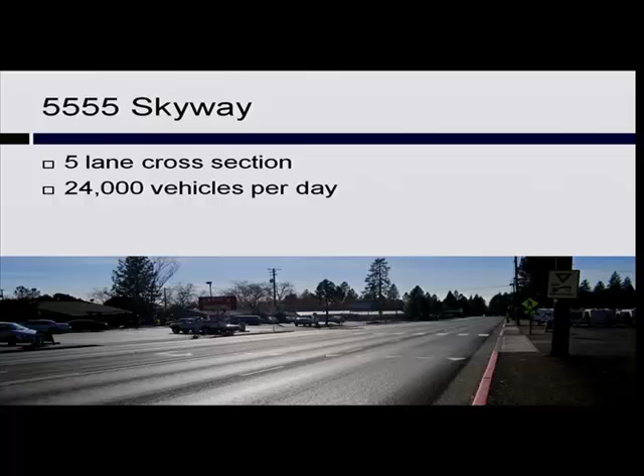First, as far as existing conditions and project history, let's divide the presentation into two different areas: one in front of Town Hall here at 5555 Skyway, and also in our downtown district between Pearson Road and Elliott Road. Here at Town Hall, we have a 5-lane cross-section and 24,000 vehicles per day. In the last 3 years, we've had 3 fatal pedestrian collisions in this influence area of Town Hall.

In downtown, however, we have different fixed parameters. We have a fixed 60-foot road width. We must provide on-street parking for the businesses, and we have a 20,000 vehicle per day traffic count. From those existing fixed conditions, we have many different observed challenges.

We have 2 independent and inefficient traffic signals, 7 uncontrolled crosswalks. Left turns currently cause through lanes to back up, so it serves as a turn lane when the number 1 lane backs up due to a vehicle looking to turn left. We have an aging roadway, limited lighting, and non-ADA compliant curb returns. That means our mobility is restricted downtown because we don't have ADA compliance for going from business to business, and that's an issue downtown.

We currently have high motorist speeds. Average speeds can range between 37 and 38 miles per hour. This specific section downtown has the highest collision rate in the town of Paradise. We have a 5.89 collisions per million vehicle miles rate, and that's nearly double the state average.

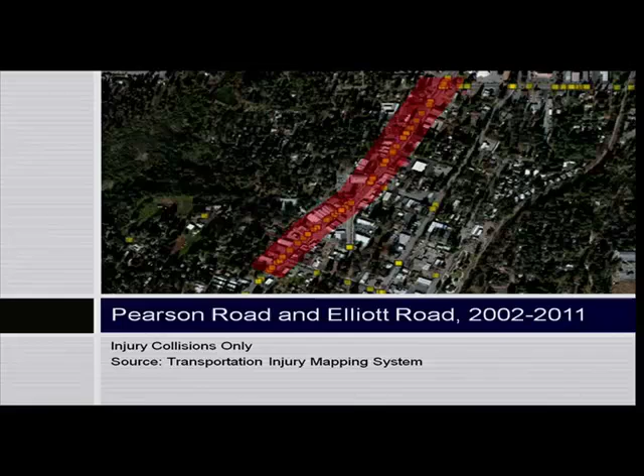As far as our downtown collision data, in the last 10 years we've had 90 injury collisions, indicated on this map with the yellow dots highlighted in red. Of those 90 injury collisions, almost 50 are rear-end accidents, which is a direct correlation to the lack of a turn lane. In addition, the majority of those collisions are due to unsafe speed, which again traces back to a lack of a turn lane.

When police officers categorize what actually caused a collision, unsafe speed is generally a catch-all for following too close, not paying attention in front of you when a car is looking to turn left. Again, of those injury collisions, who's involved? Another motor vehicle - yes, 72 out of 90, the majority. But in our downtown, our supposedly most pedestrian-friendly area, we've got 10 involving a pedestrian or bicyclist. So that presents a very big challenge in our downtown.

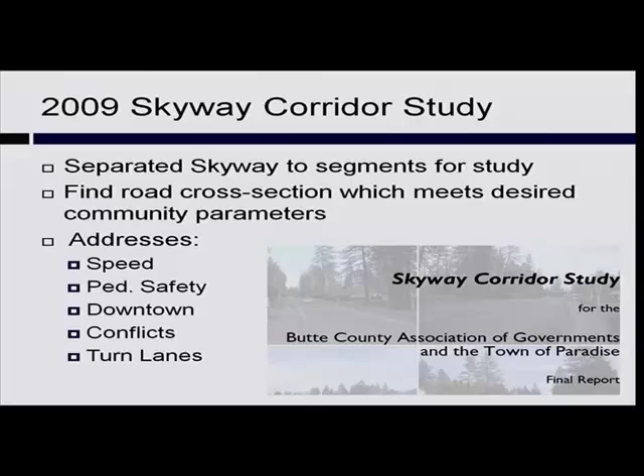So how did we end up with this project? It all started back in 2008 or 2009 with the Skyway Corridor study. This study looked at the adjacent land uses for Skyway between town limits, and divided each section into segments, looking at the best road cross-section to meet our desired community objectives. Part of that report addressed speed, pedestrian safety, downtown issues, conflicts, and turn lanes.

As far as looking at Segment B, which is the downtown, they determined that critical on-street parking must stay, but we are observing high speeds and frequent collisions. The average motorist yield rate for a crossing pedestrian was as low as an average of 42%. That's indicative of a pedestrian looking across the street and motorists just flying by, not paying attention to the state law which requires motorists to yield to pedestrians crossing the street.

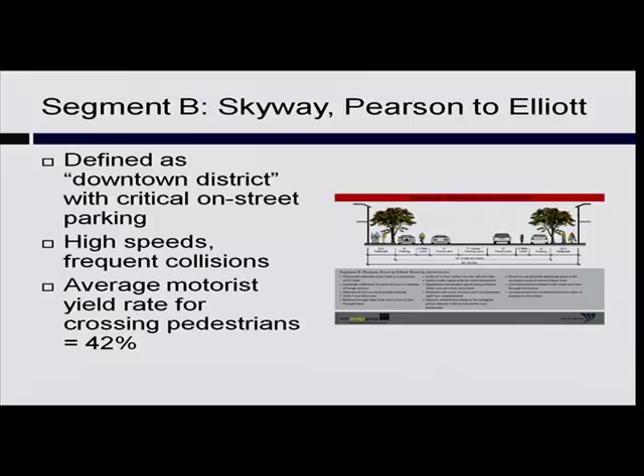As part of this corridor study, they did an extensive public outreach process, complete with stakeholder meetings and interviews. They had a public workshop where you could vote on different alternatives, and they also met with the RDA Citizens Advisory Committee. They also looked at different alternatives.

They considered alternatives 2 and 3. Alternative 2 was 2 travel lanes only, no turn lane, and 45-degree parking because we have a fixed road width - that was not selected to move forward. Alternative 3 was 2 northbound lanes and 1 southbound lane with a center turn lane also. This alternative was not selected to move forward because it did not meet all of the objectives for pedestrian safety.

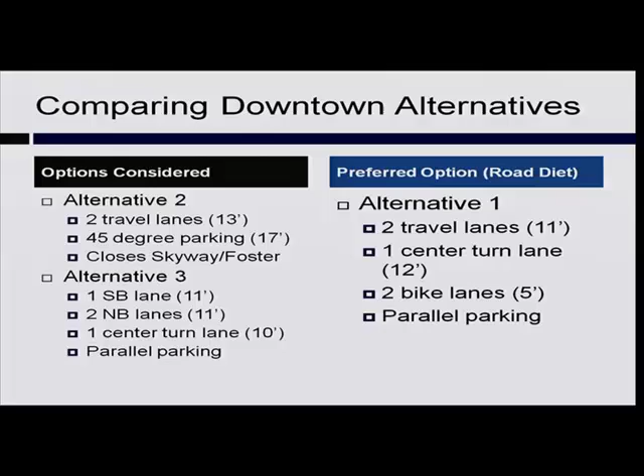However, they did conclude that their preferred option was a road diet, that being alternative 1, including 2 travel lanes, 1 per direction, and a center two-way left turn lane, including 2 bike lanes or a buffer, while maintaining the parallel parking. So why a road diet?

Why should we consider moving forward? Well, in the pre-1980s, road design was very different than what it is today. If your road volume was greater than 6,000 vehicles per day, then widening was the perfect candidate. They stated that safety would improve because we would add gaps between the traffic. More capacity, more gaps, safer. Their conclusion was also that you could avoid a rear-end collision by changing lanes. You'd no longer have to yield to the person in front of you, you could just go around them.

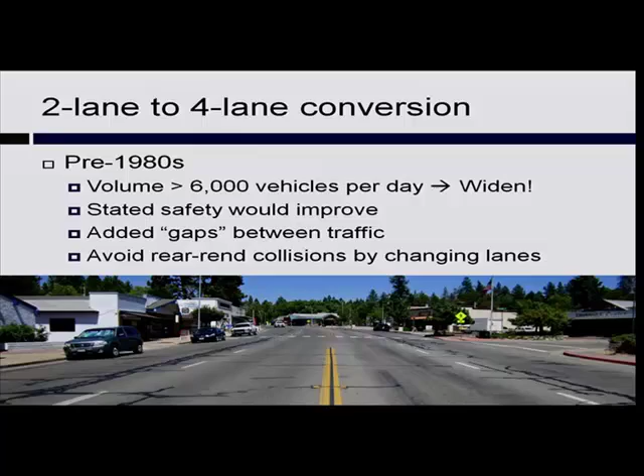Here's an example of that 4-lane layout similar to exactly what we have on Skyway. But in 1999, they did a report on that expansion. Was that decision really an effective one? When they compared different corridor elements such as volume, delay, speed, travel time, or percent traveling over the speed limit, all of those indicators increased. The accident rate increased 14%, while the injury rate increased 88%. So what they found is that without a balance to the roadway, there are more problems observed through the expansion of the roadway.

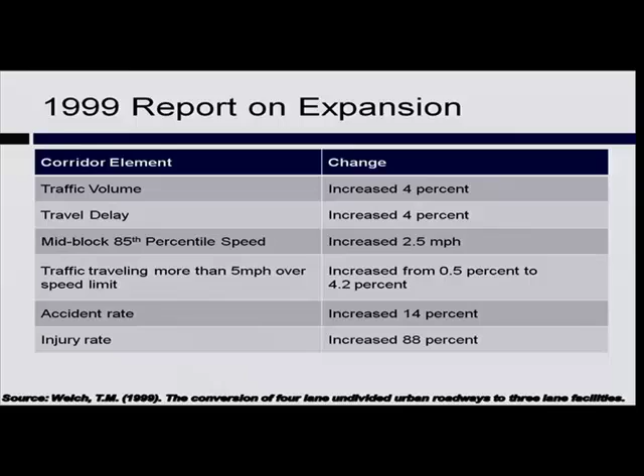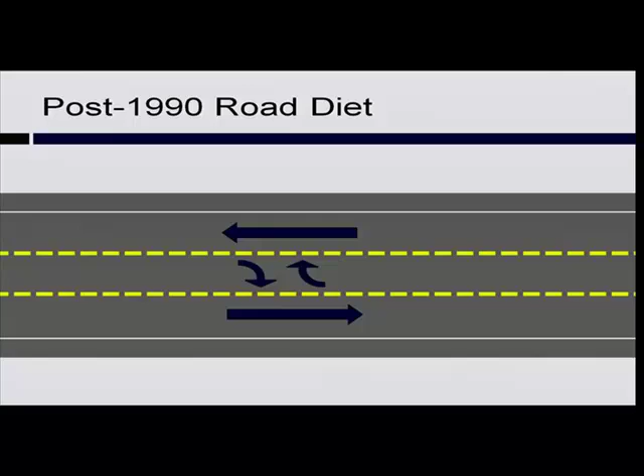So in 2013, a report was published on road diet evaluations. A road diet includes a center two-way left turn lane and one lane per direction. It compared before and after project sites for over 863 different projects. Their conclusion was that road diets can be effective for roads between 5,000 and 24,000 vehicles per day. Little to no diversion was observed. The crash reduction percentage was 19 to 47%. They also recommended signal coordination and other safety enhancements. Their overall conclusion was that it has the potential to meet community objectives while increasing safety at low cost.

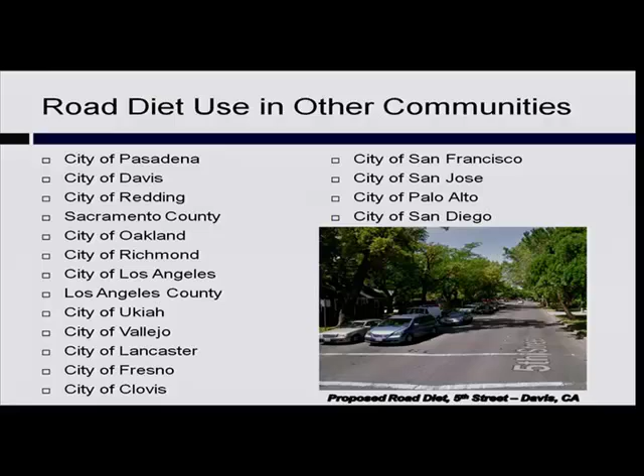Here's a quick list of other communities which are looking at a road diet. There have been an enormous list of cities and municipalities that have done a road diet on their most vital roads. This is a list of communities having the same discussion we're having tonight: is this a good decision? Why do we want to move forward? Do we need more balance to our roadway? Ranging from the city of Pasadena on Colorado Boulevard, to the city of Davis, throughout the Bay Area, and other communities closer to the town of Paradise as well.

So now, going from existing conditions to why a road diet was proposed in the corridor study, let's take a look at how this project is funded, and that's through the Highway Safety Improvement Program. That program is a federally funded source which uses collision data to assign projects. With this project, we are proposing a $1 million total project, importing actual collision data that has happened on Skyway, and they have determined that this is a fundable project and a good one to move forward with. This project was awarded in October of 2012 and has a 10% match requirement currently budgeted.

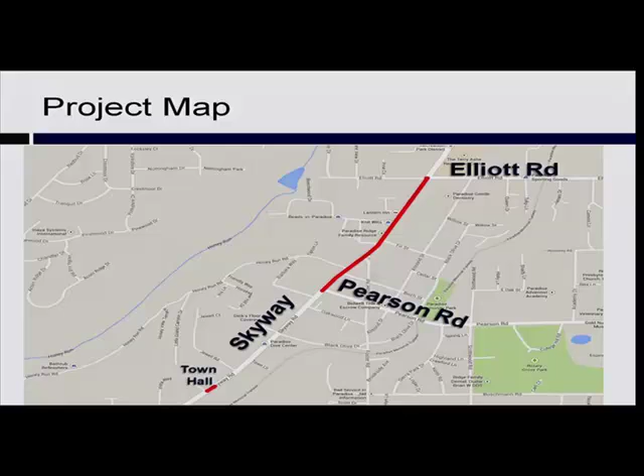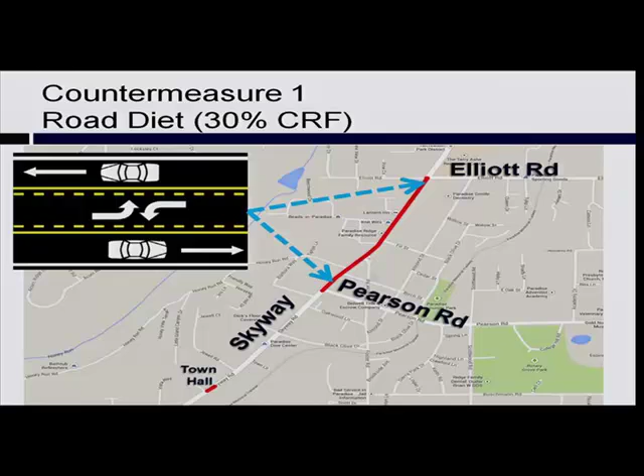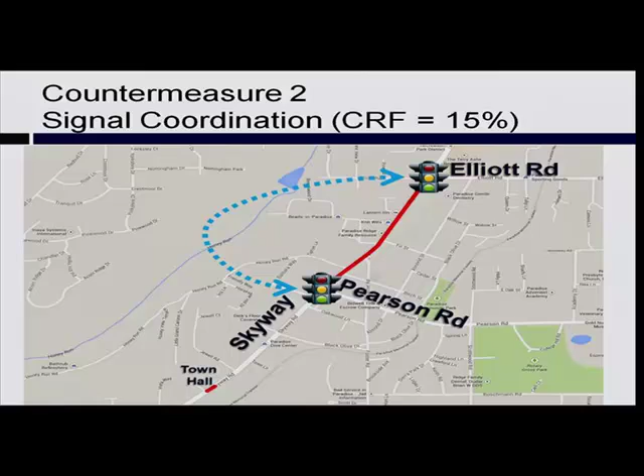So let's look at our project map and how the different countermeasures are proposed. First, countermeasure 1 has a 30% crash reduction factor, and that is the road diet between Pearson Road and Elliott Road. Countermeasure 2 is the signal coordination between Pearson and Elliott, with the goal of having the two signals communicating with each other, timed and synchronized, so if you have a green light at one and travel the speed limit or the flow of traffic, there is a green light waiting for you at the next signal. Countermeasure 3 is the enhanced crosswalks, which has a 35% crash reduction factor. In the downtown area, we're going from 7 uncontrolled crosswalks to 4 evenly spaced crosswalks.

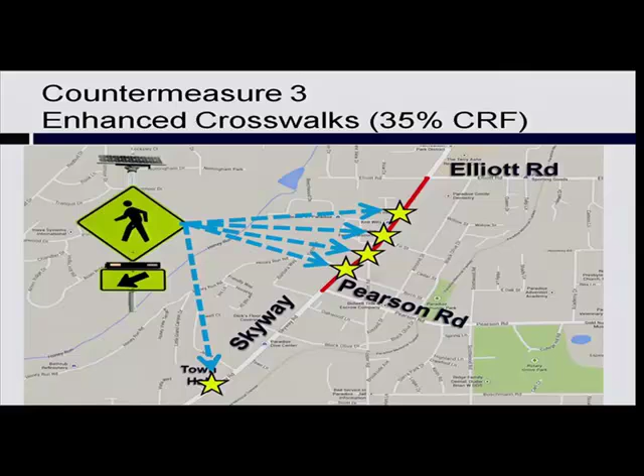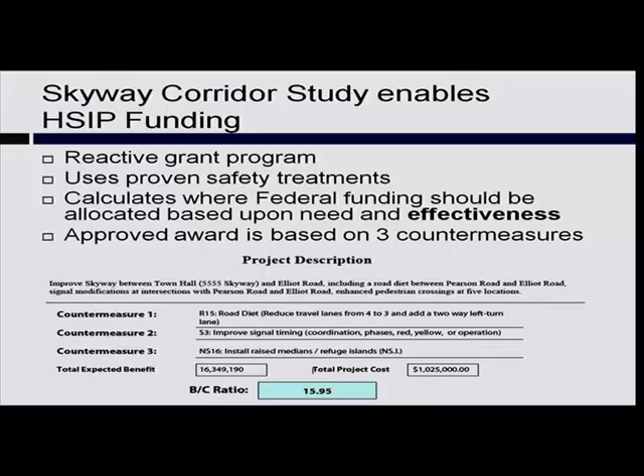So again, the Skyway Corridor Study enables our HSIP funding. Using this reactive grant program that requires historical collision data, it uses a calculation that directs funding to where it's needed and where it will be effective. This is a total project package based on 3 countermeasures: the road diet, the signal timing, and the installed medians. This project isn't a pick and choose as far as that package, but this is the funding source that we have obtained.

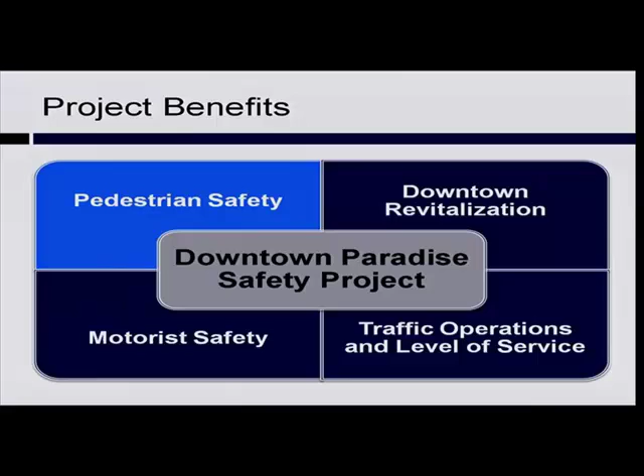Project benefits, and so we'll transition from the actual grant to exactly why this is a good fit for the town of Paradise, covering 4 priorities: pedestrian safety, motorist safety, traffic operations, and downtown revitalization. I'll first discuss pedestrian safety.

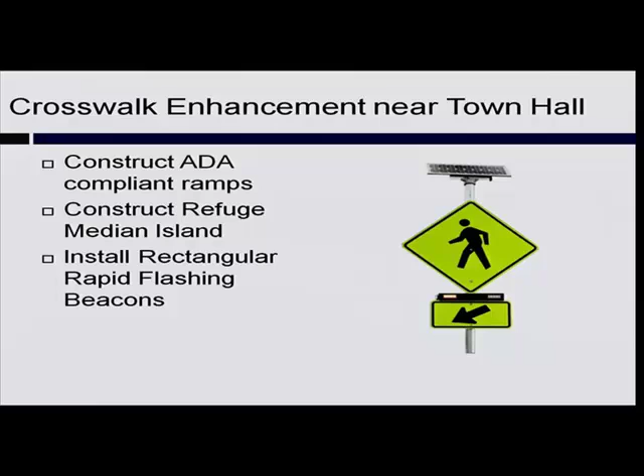At Town Hall, we are looking at constructing ADA-compliant ramps and adding a refuge median island. This decreases the distance a pedestrian has to cross at a time. They can start at one side of the street, clear the first 2 oncoming lanes, reach a refuge median island, push a beacon again, and cross the final 2 lanes safely. That's a huge benefit for this crosswalk location.

Last meeting, Councilmember Culleton brought up a great point that this current crosswalk location needs to be looked at again. So I have an exhibit that will demonstrate where we should really take another look and provide an alternate recommendation for this crosswalk location.

As far as evaluating left turns, we have about 8 different driveways to deal with here. With median islands, driveways can be problematic as far as left turns, so we want to make sure this is a smart decision.

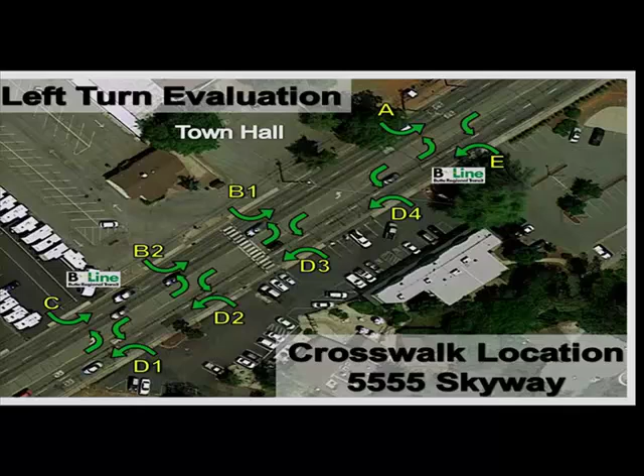Our left turns are shown here in green for each driveway, and they will stay green if they are not impacted by the median island. This graphic is a little confusing, but essentially the arrow is green if it isn't impacted.

With our proposed island at the existing crosswalk location shown here, we can see that we are impacting 3 left turns from businesses such as Rancho Engineering, Andy's Cafe, and also Town Hall. We also looked at relocating the crosswalk further south to the south property line, and we can see that it also has 2 red arrows, meaning those left turns are no longer feasible.

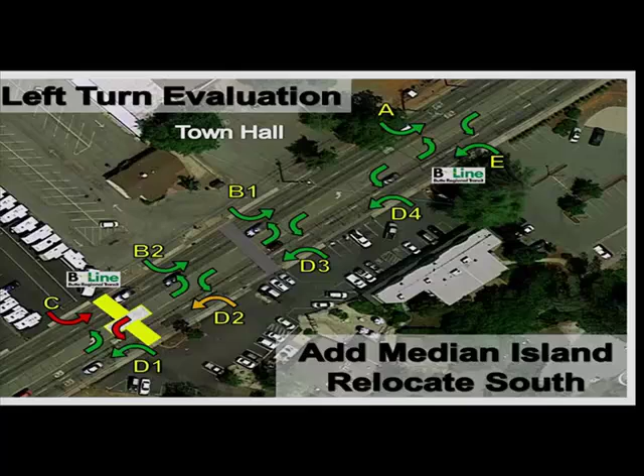Our proposed and recommended alternative for council to consider is relocating the crosswalk to the north boundary line, which only impacts 1 left turn into a property which already has 4 available driveways. Staff appreciates Councilmember Culleton bringing forward the opportunity to look into this further, and it's a change we can make and look forward to recommending to council to move forward on.

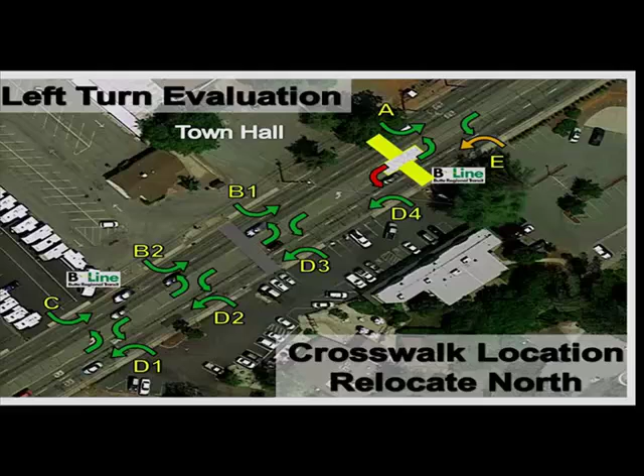We really encourage pedestrians to make eye contact, clear each lane individually, and never assume someone is going to yield for you. And we want to encourage motorists to yield to pedestrians per state law until a pedestrian completely crosses the street to the other side.

Now looking at our downtown, we have a different proposal. It's similar, it has the beacons but no island, but we do propose 2 crosswalk bulb outs. What the bulb outs do is shorten the crossing distance, which increases visibility as well. So if you're crossing the street, you'll be out in the bulb out, but if you're shopping around downtown, you won't be standing on a bulb out.

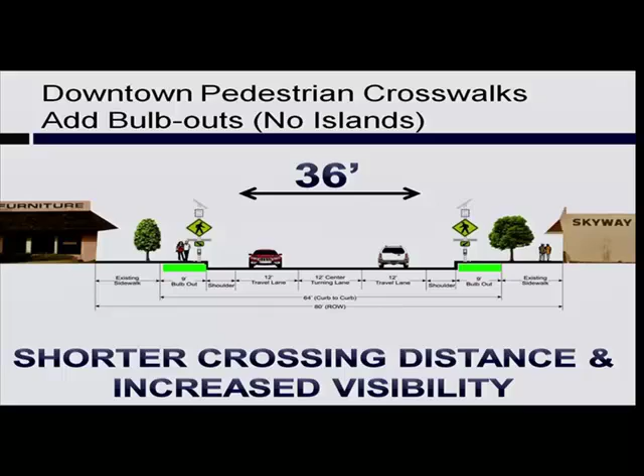A quick note that this area is not decreasing the total road width. This is only occupying the same space that 1 parked vehicle would take up, so our actual effective road width remains the same.

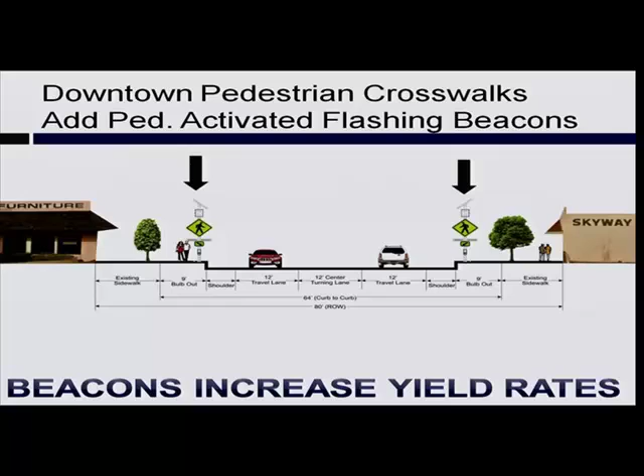We have the pedestrian flashing beacons, which increase yield rates. We noted that 42% was observed back in 2008. These beacons have been proven to increase yield rates upwards of 80%.

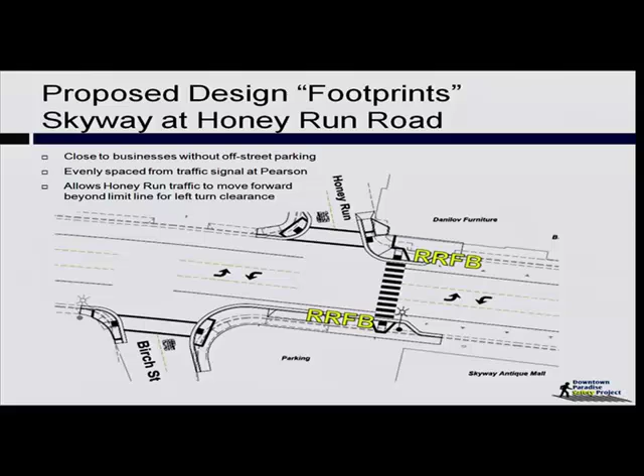Our first of 4 enhanced crosswalks is at Honey Run Road in front of Danilov Furniture and Skyway Antique Mall. This crosswalk location was chosen because it's close to businesses without off-street parking. It's evenly spaced from the traffic signal at Pearson, and it allows Honey Run traffic to move forward beyond the limit line for left turn clearance.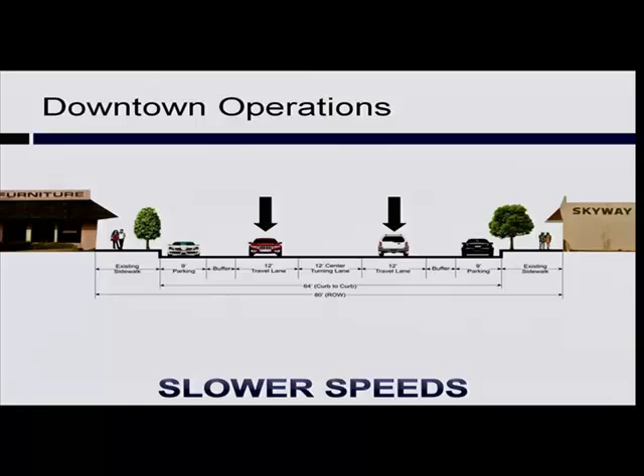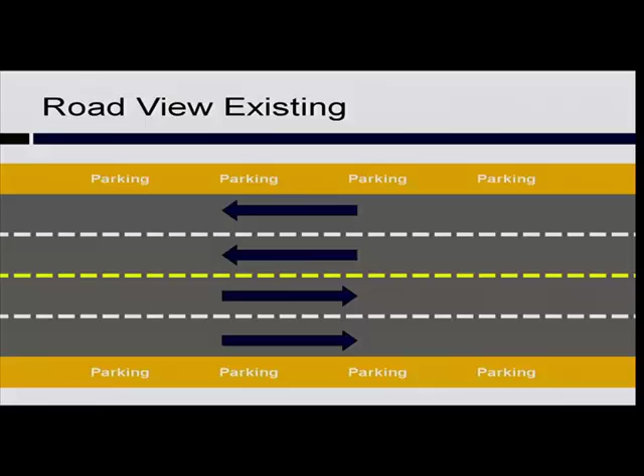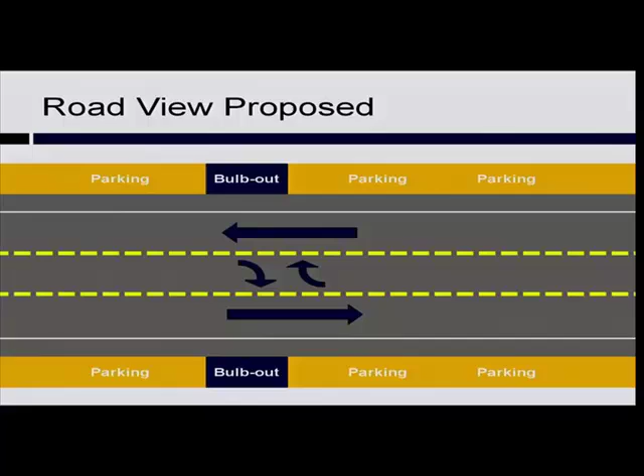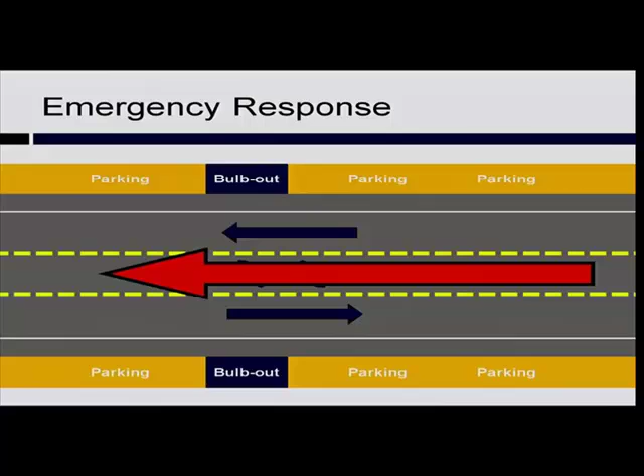Emergency response: adding the center turn lane has benefits here too. This is a layout of our existing road. The effective road width is measured between the parking areas, so if we replace one parking spot with bulb outs, the effective road width stays the same, just the stripes will differ. For emergency response, that center two-way left turn lane has the potential for responders to overtake and reach their destination quicker than they can today, in both directions.

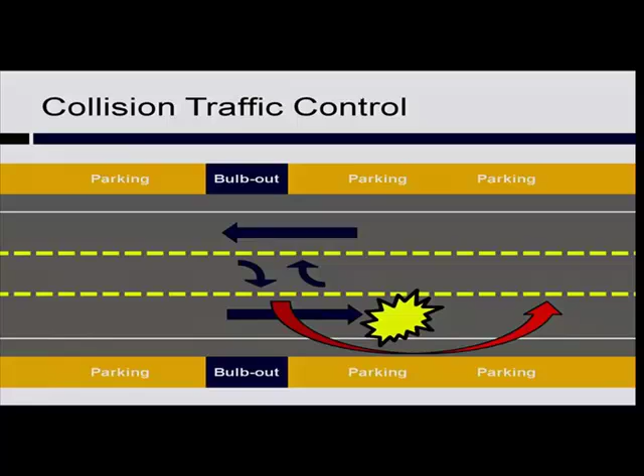For collision traffic control, if there was an incident at a bulb out, that center turn lane serves as a benefit and a tool to route traffic around. Again, the striping is different, but the road width stays the same. So any collision today causes interruption and disruption, but with the proposed project, there would still be interruption, but the collision would be routed around safely, on the same road width. If a collision happened outside the bulb out, you could also potentially use the parking area, if unoccupied, to route traffic around.

In the last month, since our last council presentation, we've had an emergency service agency coordination meeting attended by Paradise Police Department, CAL FIRE, California Highway Patrol, Butte County Sheriff's Office, Butte County Emergency Medical Services, and Butte County Office of Emergency Management. Our takeaway was that if we can reduce collision frequency and severity, that's a huge benefit to this project. The turn lane adds flexibility for response, and we will continue working with Butte County Office of Emergency Management on evacuation preparedness.

We understand that two lanes southbound or northbound could be easily implemented at any time, and three lanes or contraflow could also be implemented, but would require additional resources. We continue to pledge to work with Butte County Office of Emergency Management on this issue. All agencies have responded - we asked them to report back and provide written feedback on the project and their level of support. All agencies that responded indicated their support to move forward.

At this time, I'd like to turn the lights on and ask Battalion Chief Curtis Lowry, who represents CAL FIRE, and Paradise Police Chief Gabby Tazzari-Dineen, to come forward and speak on this project and its benefits.

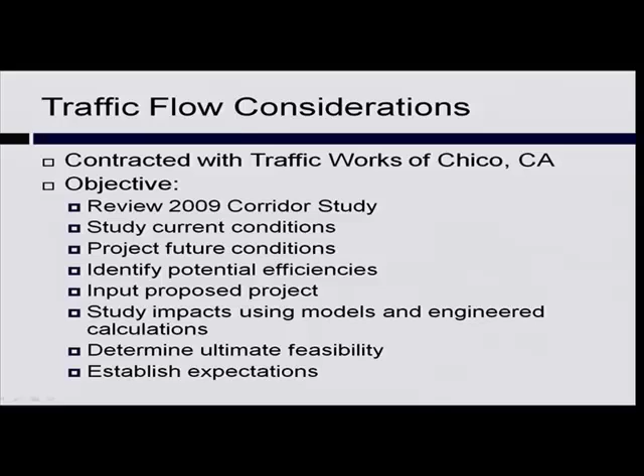So we actually hired Traffic Works of Chico to take a fresh look at that 2009 corridor study that made that recommendation. Their task was also to study current and future conditions, identify potential efficiencies, and input that proposed project that we call the road diet, and see what that does to capacity and travel times, and study the impacts using modeled and engineered calculations. Finally, their task was to determine ultimate feasibility and assist us in establishing expectations. So the first part of their project was to collect traffic data in the downtown and also at the intersections.

In our downtown, we know 20,500 vehicles per day. And just north of Wagstaff, continuing all the way up to town limits, we see that we have 10,750 vehicles per day. And so it's a fair point to make that 50% of our traffic is commuting from the Upper Ridge. That's part of the consideration in this process.

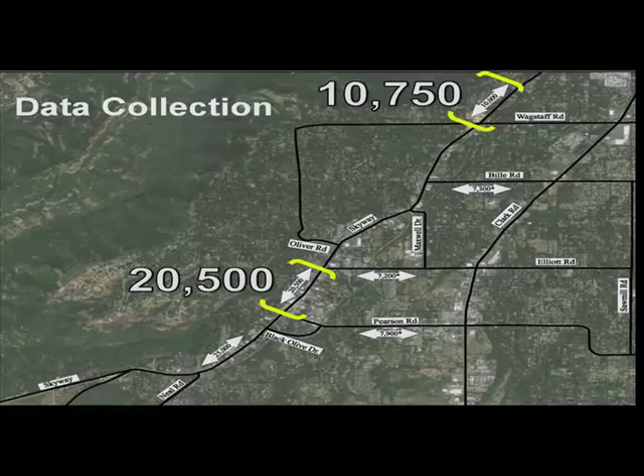Traffic volumes historically have grown, but over the last 10 to 15 years, they've actually stabilized. Our Butte County Association of Governments traffic demand model shows no volume growth north of Elliott. But understanding this project needs to assume future growth, which we would all appreciate in this town, we assumed a 10% growth rate at some unknown year to be determined when it actually happens.

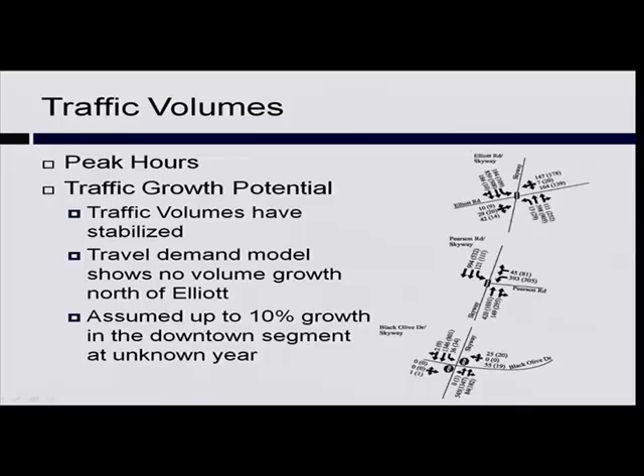As far as intersection design, I'd like to take a quick moment to point out existing conditions at Elliott and Skyway here, with north being up on the screen, and the proposed design. We have 2 lanes southbound existing and 2 lanes northbound. The proposed design has a lane drop, which we've determined to be the safest transition rather than a south merge movement. It includes 1 lane in each direction.

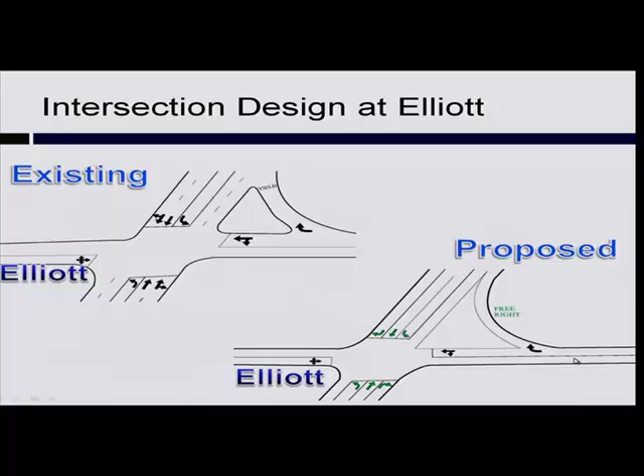Also a benefit of this project allows us to take this triangle, which we're all familiar with, where you yield to the both lanes coming north on Skyway. This becomes a free right, where the 2 lanes actually don't start until this free right is complete from westbound Elliott to northbound Skyway. That'll help — that's one of those efficiencies and tweaks that we can make to help this project work better.

As far as intersection design at Pearson, really no major changes except for the reduction in lanes and that lane drop northbound at Pearson. But this right turn only becomes a right turn overlap phase, and what that means is when the light is green for traffic to come off of Pearson, we can keep this green light arrow green, so keep traffic moving from Skyway to Pearson. That's, again, another efficiency for the project.

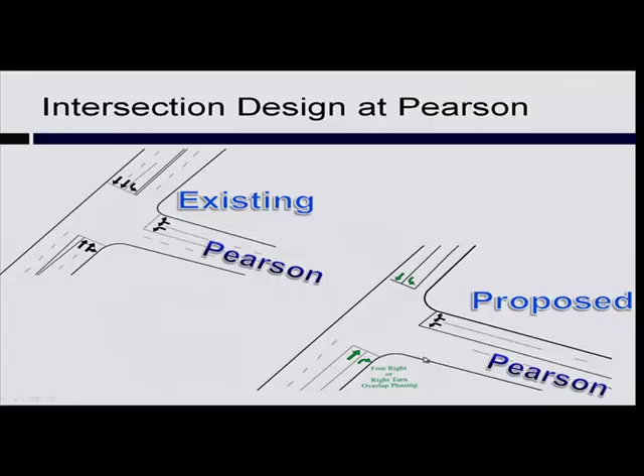As we discussed earlier, the project includes coordinating the 2 traffic signals. While the coordination is great, the optimization is even better. What that means is when we add time to serve Skyway and help get the traffic through, we can actually mitigate the reduction in capacity.

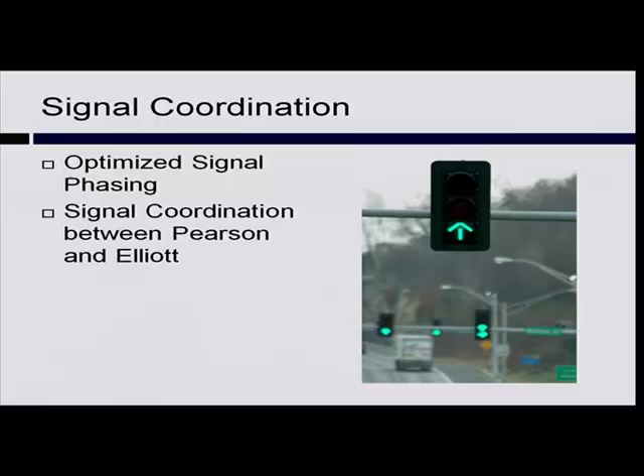Level of service is a unit of measure for how well an intersection is operating, with letter grades A through F. Currently, the Pearson/Skyway intersection operates at a B, and the proposed project keeps the level of service at a very good C. The Elliott intersection operates at a C today versus a C in the future with the project. But we know that we can expect a modest delay, 9 to 10 seconds, during certain times of the day, and I'll have more on that in a second. We do know that acceptable level of service in all engineering design is D or better, which is a 55-second delay — we are not nearly at that level with this project.

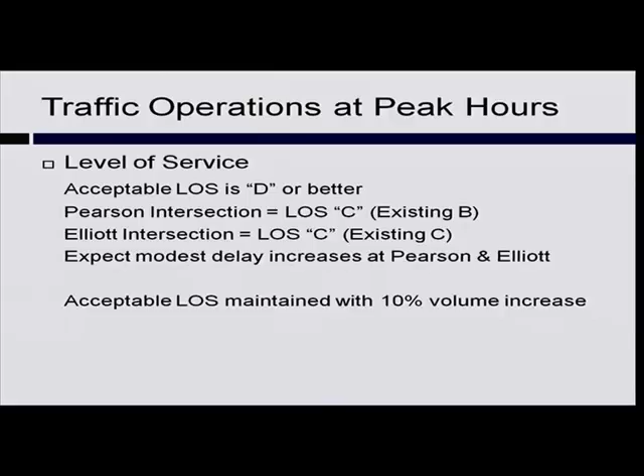Queue lengths, however, are something that will be very different. A queue length is how long of a line the cars waiting to get through the intersection will form, how much space they will occupy. We do know from the models that we can expect moderate queues through the afternoon. Skyway is a very busy road, so we can expect longer queues during the peak periods.

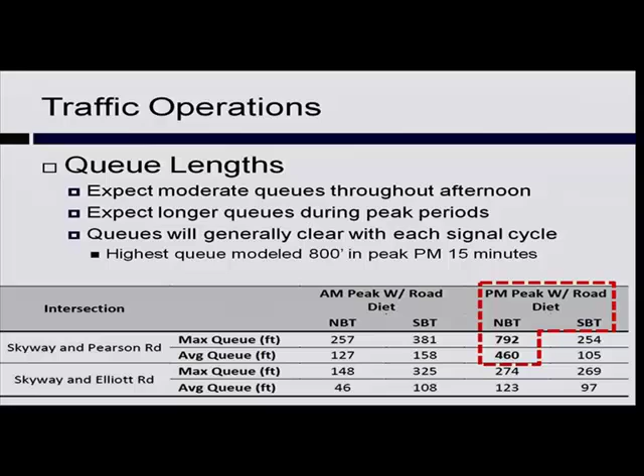We've done a model, which I'll show here in a slide, showing the highest queue modeled was 800 feet in the afternoon peak 15 minutes, at about between 5:45 and 6 p.m. at Pearson and Skyway. That's highlighted here in this table below, which shows the maximum queue the model has predicted, and the average queue, which is 460 feet. So it's really an acceptable queue length for the safety benefits we are proposing.

So we have a couple of model simulations. Our first one is the peak AM 15 minutes at Elliott.

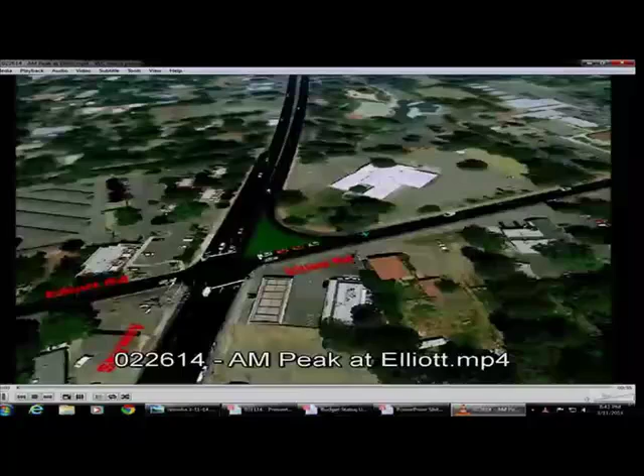This model stems from all the data collection efforts undertaken by Traffic Works, with cameras and tubes on the road. That allows us to input into a software program that can predict exactly how this road will function.

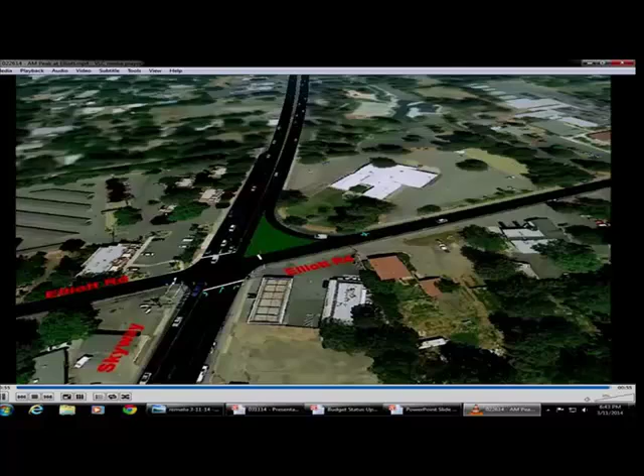So this is the southbound direction, and here's the Elliott Road signal. We see the light has turned red for through traffic, and you'll see that queue start to build up. But the most important point is that every queue we've modeled clears in one signal cycle. We've all been in a town where the traffic signal makes you wait 2 or 3 cycles to get through, and how frustrating that can be. We can assure you that with this project that will not be a daily occurrence. So the lines may be long, but that doesn't mean the project isn't working — it just means they are how we predicted they would be.

The next item is the peak PM 15 minutes, which is really the controlling factor. We know the peak afternoon at Skyway and Pearson has the longest line of cars. So here's the video, Pearson Road and Skyway.

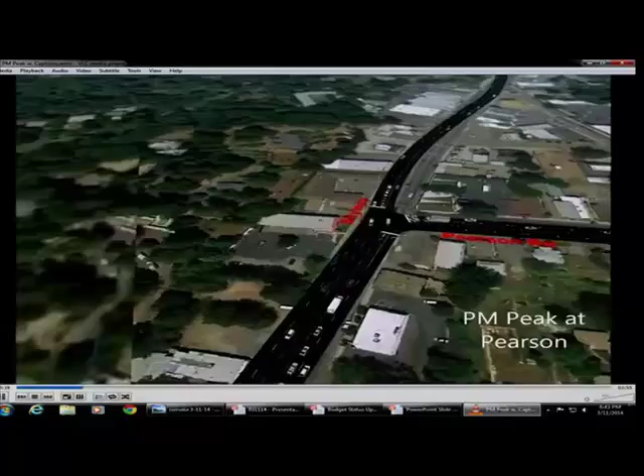This is again at 4 times speed, so traffic will be flowing fluidly through the downtown in one lane. It'll zoom out here — the camera is zooming out, and here's Black Olive Drive. Again, during that peak 15-minute period we predict the line will go almost to Black Olive. So when we watch this model and the light turns green for Skyway, the important point is to see who was last in that line, and make sure they get through the traffic signal in one cycle.

Well, the merge can actually start. We feel that traffic will adjust and learn that lane number 1 is for through traffic, and if you want to turn right at Pearson, you'll be in lane number 2. But the actual signage and markings will start at Black Olive. So it's not really a merge, it's a lane drop, and you can pick your lane at any point between Neal or even before Neal along Skyway.

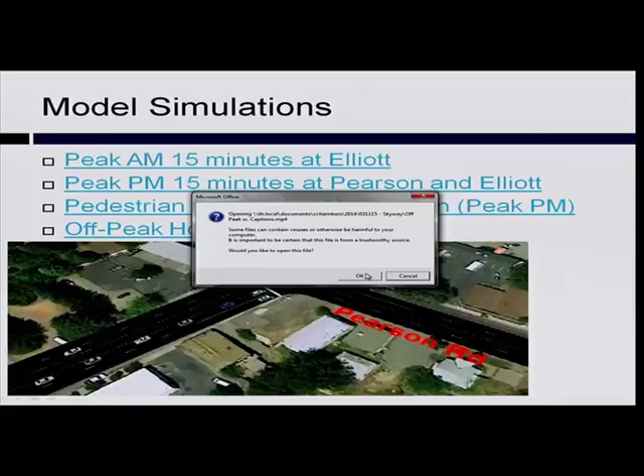So the important point is that it does clear the actual volumes, but it's important to keep in mind what the worst 15 minutes of every day will look like. Our next video will show the off-peak hours at these 2 traffic signals, and what the more common occurrence will be like. Because a long line during the busiest period that still gets you through in one green is acceptable — it's a decision we're aware of, but we understand the safety benefits are there.

Here is an off-peak hour, which is more typical — the line would definitely be under 300 feet. Not very exciting, because it runs very efficiently and fluidly. These cars travel through the intersection in a line, and when they get to Elliott, there will be a green light waiting for them. So rather than stopping for 2 traffic signals, they're just stopping for 1 now. This is off-peak at Elliott — not much going on, showing the project benefits during these off-peak hours.

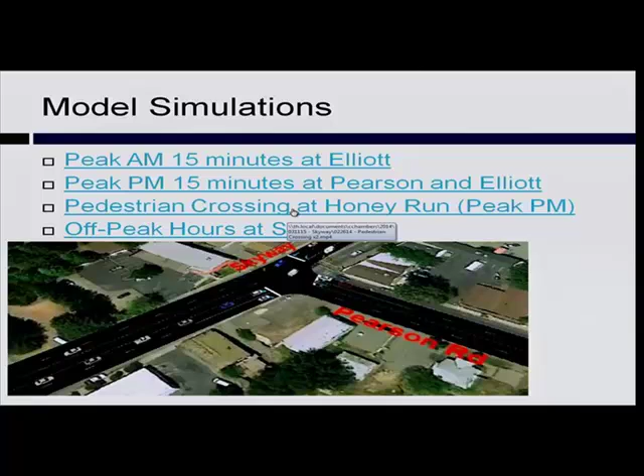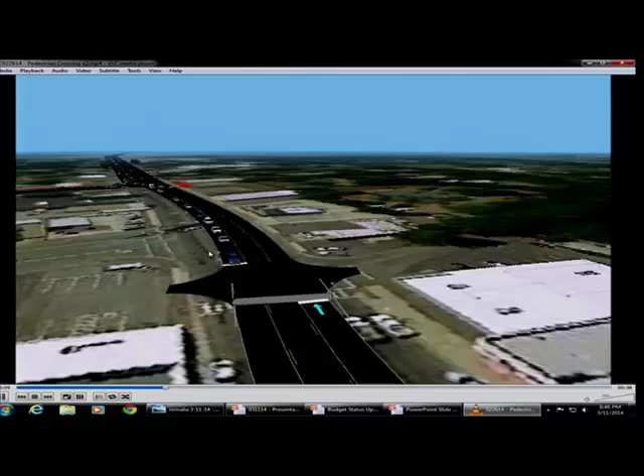This last video was requested at our last presentation to council back in February. We were asked what a pedestrian crossing does to that peak 15 minutes — say somebody pushes the beacon and the yield flashing signals come on, how does that affect oncoming traffic? This video, though a little hard to see, shows that it does require traffic to stop, but by the time the pedestrian gets to the other side of the street, it hasn't even begun to impact the traffic coming through the signal. The distance between the 2 crosswalks and the traffic signal is over 400 feet, so we are confident that pedestrian crossings during the peak 15 minutes will not be a major interruption to traffic flow.

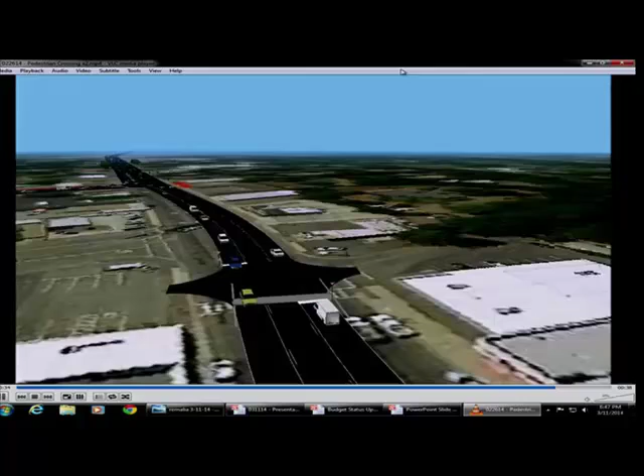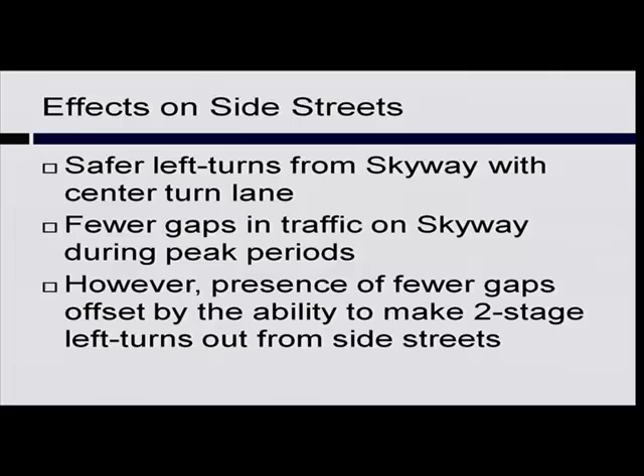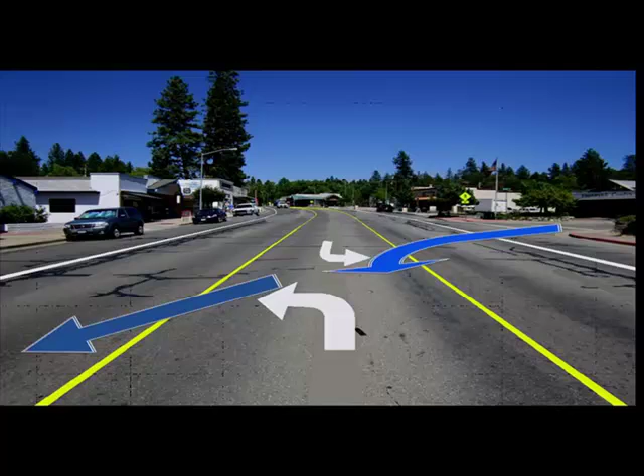Moving forward, we're still talking about motorist impacts and benefits on the downtown with this project. We understand the side streets will be impacted. We'll have safer left turns from Skyway with the center turn lane, but fewer gaps to make that turn. Many people tell us it's already hard to turn left. That's because you're clearing 3 lanes, essentially 2 coming down at you and 1 coming up the other way. With a center turn lane, you only have to clear 1 lane, look left, clear that lane, and use the center turn lane to make a left turn in 2 stages. Here's an exhibit showing that movement from Foster: left turn to the refuge center turn lane, then your second stage left turn into the southbound lane.

Now let's look at the project travel times. Many people were concerned about their daily commutes to work or from work, or picking up kids. We understand time is important, and we did not want to bring forward a project that negatively impacted the time it takes to get from point A to point B. This exhibit shows travel times along Skyway between Neal Road and Bille Road. In the northbound AM peak hour, the models show a 3-second increase in travel time. In the southbound AM peak hour, it shows there can actually be an 11-second decrease. You may ask, how is that possible to decrease travel time while taking away lanes?

It gets back to our point on signal coordination—not stopping for 2 signals, but just for 1 to get to your destination. The northbound PM peak hour, with that 800-foot queue we will see, has a 13-second increase. The southbound PM peak hour has a 9-second increase. I've been telling people the same thing: engineering is showing the increase is 13 seconds or less. I'd love to say you can get out with your stopwatch after this project moves forward, and if you're delayed 13 seconds or more, let me know. But I can't say that. What I will say is that the scale of delay on this project is on the scale of seconds, not minutes or tens of minutes or traffic lines to Chico. This is a proven design that will work, and with the right treatments and signal coordination, the project can be completed successfully.

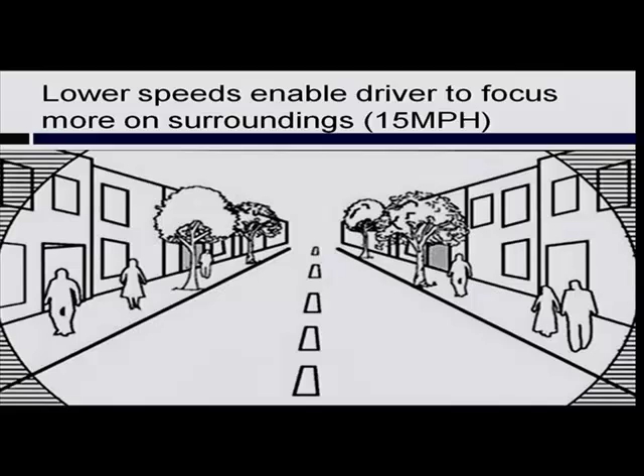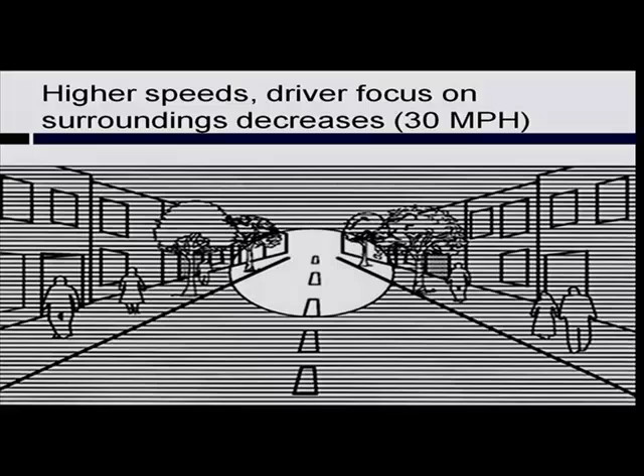A quick exhibit that was interesting to me was that lower speeds enable drivers to focus more on their surroundings, and I think this is really important for safety as well as for businesses—so motorists can actually see what they're selling. Higher speeds, however, around 30 miles per hour, decrease your focus while driving. That's just an important point between the two.

Public outreach: we understand this project has the potential to fundamentally transform the downtown, so we want to move forward with a public outreach effort that solicits comments, input, and opportunities for changes. Since our last September pedestrian safety workshop, we've had numerous council meetings and presentations to groups that have invited us. If you're aware of a group we haven't talked to, shoot us an email and we'll get something arranged. We have our council meeting tonight.

Our public workshop for our safety-focused project is March 20th between 6 and 8 p.m. here at Town Hall. We'll bring this back to council for an update in April. We're really focused on making this a community decision and talking about what this project means. And then in May, we are looking for council to consider project approval.

So a quick note on business workshop results. We did a survey of all the attendees, and we found that 75% of the people do not feel safe walking in the downtown, and 50% do not feel safe driving through the downtown. They indicated that their top priorities were the high observed speeds, that pedestrian crossings were a great concern, and the overall safety of the downtown corridor.

Of these people surveyed, 100% believed that change is needed, and that's pretty astounding to think a group of 30 people can all agree on one thing: that what we have today is not working and something needs to change. 80% of the audience indicated some level of project support.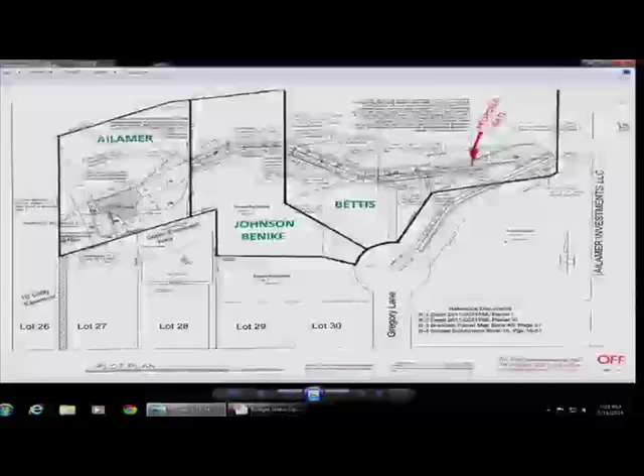This may clarify some questions. The access easement in question runs through three properties: the first owned by the appellant, the second owned by this party, Johnson Benike, and the third parcel owned by Ailamer, funded by Mr. John Romalia.

The proposed access gate is in this location. There is no gate on the easement at the moment. This is the proposed location for an access gate, located approximately 500 feet from Ailamer's property.

We believe that Mr. Romalia does have other options that we would have absolutely no quarrel or problem with, such as placing the gate at the end of the easement, protecting his property, in a location where it doesn't restrict anyone's access to any easement to which they might have a legal interest.

We continue to agree with our legal counsel's opinion and are recommending that you uphold this appeal and reverse the Planning Commission's interpretation.

Then provided a finding that can accommodate that, but I need to add that you can reject the appeal and support the Planning Commission's decision by simply changing three words in that proposed finding, much like was done at the Planning Commission hearing on this matter. A third option would be for this council to provide an alternative direction to staff, or an alternative interpretation of that section in our municipal code.

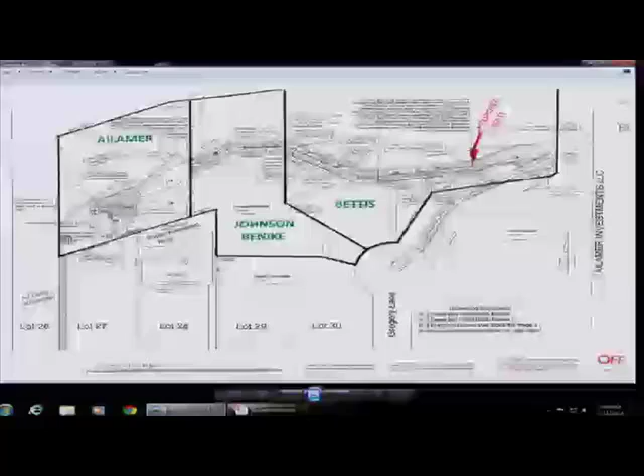There are three other people who are being greatly impacted by this fence. He wants to make this look like an estate's drive up to this squalor mess. The Johnsons and the Benekes, I've been to their home. They have to look at this most disgusting slum I have ever seen from all windows in their home. They spent over $300,000 to buy a beautiful home and remodel it and make it their home to live in. This is ruining their home.

Mr. Ramalya talks about dumping $100,000 into this project of his, if you can call it that. It looks more like a dump site. The Johnsons have, I bet you, $400,000 in theirs. And the Bettises, 30, 40 years have lived there.

This is not right to allow one person to put a gate and equate it to gates on Valley View, Redbud, and other quality establishments that have been built by Bolin, by Wentland, and others. It is just not the same thing at all. We are not comparing apples to apples.

And as far as the gate and all of that goes, that all needs to be—I completely agree with you, the way that it's written does not make sense. And I believe that Mr. Ramalya is bringing this to the town to help benefit his court case, go to court and say the town council said I could put this gate in here. Our town okayed this gate.

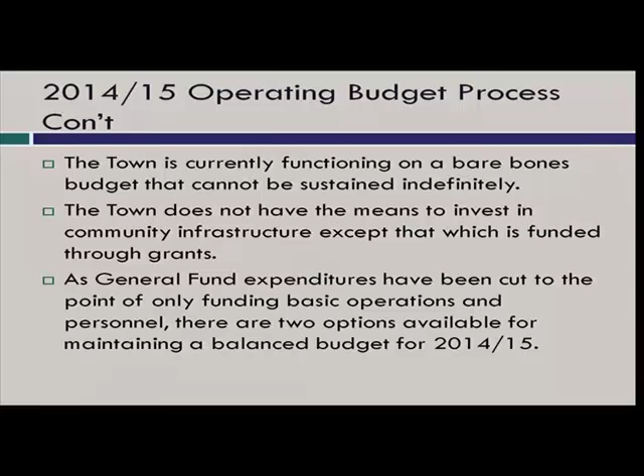As you know, the town is currently functioning on a very bare-bones budget that cannot be sustained indefinitely. The town currently has no means of investing in community infrastructure except for that which is provided by grant funds. General fund expenditures have been cut to the point of only funding basic operations and personnel, and there are really two options that I see available for the 2014-15 budget.

We can roll forward our existing budget, recognizing that we will not be able to do any sewer feasibility and planning, equipment replacement, facility maintenance, complete employee training, or provide contributions to our retiree health unfunded liability. Or we can look to reduce a portion of services or personnel in order to fund some of these important items.

So other budget considerations: we will be meeting with Town Council tonight in closed session to discuss employee negotiations and whether we can afford not to ask employees for a 6th year of employee concessions. In addition, next month we will bring forward some options concerning perhaps diversifying or enhancing revenues for the future.

Are there any questions?

Mrs. Will? Thank you, Gina. Basically, I have some comments. As the manager, you can see where we are. We have a bare bones budget that cannot sustain us in the future. We have to look at something.